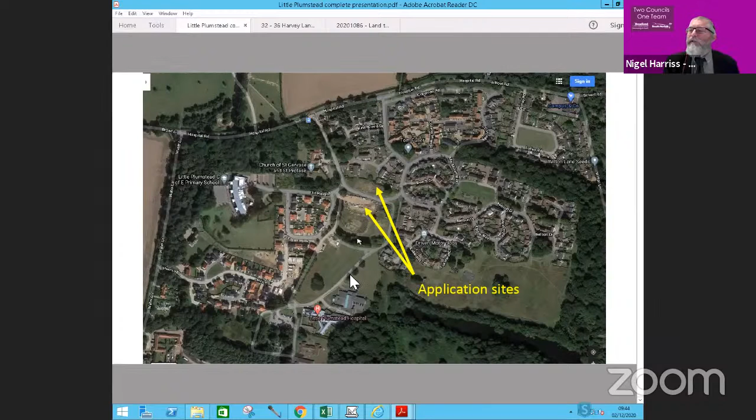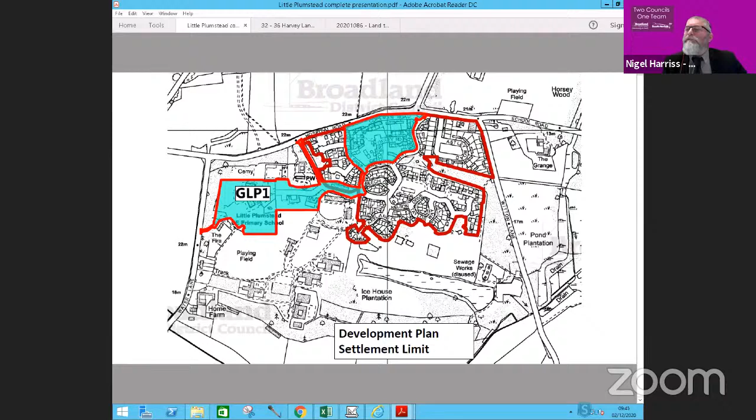Next slide is the extract from the site allocations DPD to demonstrate the existing settlement limit. This only really picks up on the more historic development in relation to the site. We've got the area here where 225 units were constructed, and the area within the settlement limit where an additional 75 were built. The northern application site, 2020-1200, is within the settlement limit. The site of the former Old Hall, adjacent to the settlement limit but outside, sits to the south here. You've then got another 108 dwellings in this location, which are outside of the settlement limit. Next slide.

In terms of the planning history, the key one was the 2013 permission, which was the second phase of the hospital that was declared surplus to requirements by the Secretary of State for Health. They secured outline planning permission for residential development, conversion of the hall, which you can see here, and car parking in relation to the hall conversion for about 17 apartments for market housing.

I've got a larger scale plan of that, illustrating the additional development that's now taken place under reserved matters and full planning, together with a new access put into Water Lane that delivered an objective from the Plumstead neighbourhood plan, so that development was not going out in terms of its access onto Hospital Road.

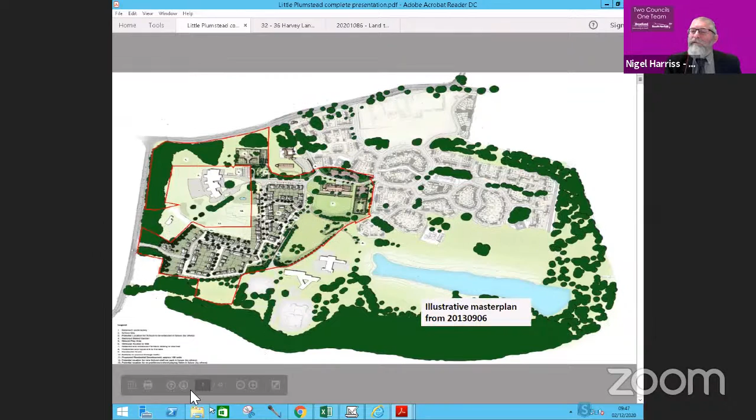So a new access serves all of these properties I'm outlining here, going straight back out onto Water Lane, but there is pedestrian and cycle connectivity back to the remainder of the estate, as there is public access to all of the woodland bordering the application site, including the open space to the south and north of the lake, where we have additional play areas referred to in your report. This is a larger scale extract of that master plan.

So this was the hall that was to be converted. It was a two-story building, and we'll come on to pictures of that. It was then to have car parking on the north side.

On the north side is where a two-story administration block, flat-roofed, used to exist in the NHS days when this was a functioning hospital, and then additional parking to the side, and I think what was going to be some private space, and then open space to the south of the former hall, and that's the area subject to the two current applications.

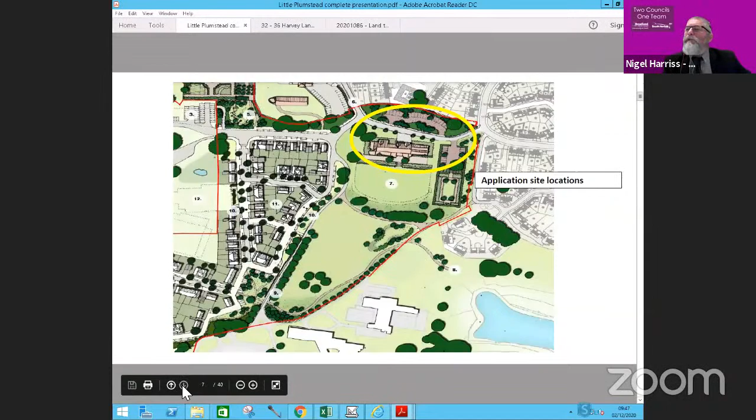So we'll move on to the first one, which is for the 11 dwellings on the south side of Old Hall Road. That's the application site.

You saw on those slides the route that comes in. Old Hall Road comes in off Hospital Road and then serves the existing residential development. The hospital access comes through and to the side, into the south here. That's actually been rerouted.

The original hospital access was this little spur off here, and it was seen more practical for that hospital to come off to a new estate road. So this area of former access road to the hospital has been landscaped and now forms part of open space as part of the wider site.

That access road then leads across to the primary school and also to the former walled garden, which is a successful community project as part of development on this site. Development has delivered a serviced access road to that walled garden, and that walled garden has now been taken on by the parish council. They've repaired it, and a community trust now operate a cafe and community shop from that site, which has very much come into its own in recent times.

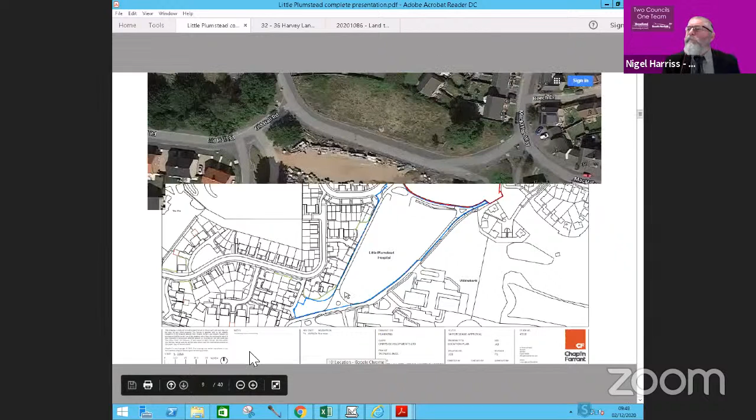So this is where the old hall stood. Following the fire, it had to be demolished because it was unsafe for health and safety reasons. So this is the brownfield area of the former old hall, currently used as a site compound in relation to the completion of the adjoining housing development.

There are some hospital service buildings here that provide electricity still to the retained hospital. They are referred to in the report. They have to be retained currently until they can be relocated, but the developer is proposing, as part of this application, to make them good, tidy them up and landscape them. And that's then the area to the north.

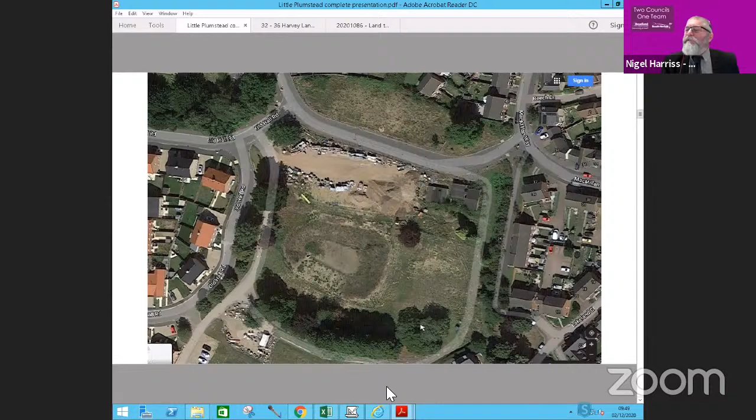Next slide. This is the footprint, looking at the center of the slide here, of the former hall that was to be converted and the old canteen building that stood there. And that very much follows now the footprint of the proposed development.

So these are the elevations of the old hall. This bottom right-hand slide is the frontage elevation that it presented to Old Hall Road, a two-story building with a long built form, as you see here, presenting itself to Old Hall Road. This was the picture of the rear elevation to the south, overlooking the open space.

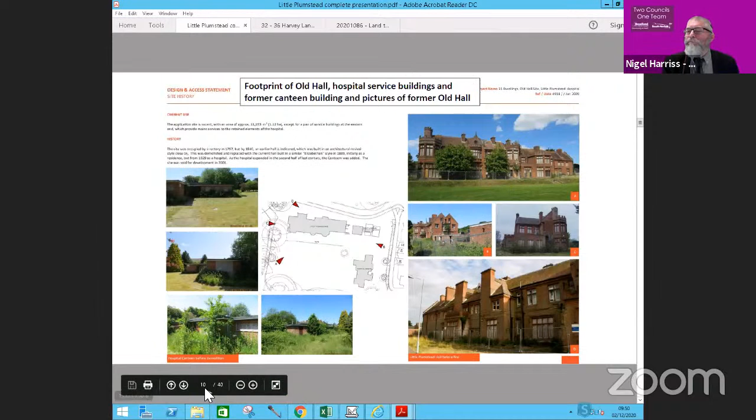So the application, when it originally came in, was for 15 dwellings. It proposed a terrace of units along the frontage, 2 linked units returning on the left-hand side, presenting themselves in single-story form to the west, and then a new access road, a private drive serving the retained service buildings, and also these units, 7 units at the time, which were to be for affordable housing.

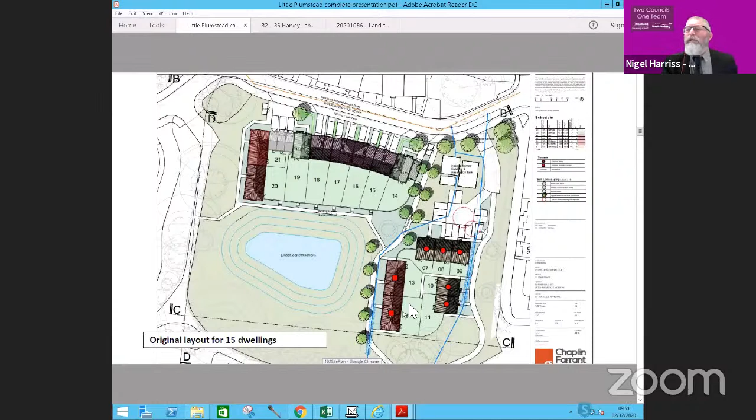That has been revised in terms of providing a layout that's more akin to the former building that stood there, and also so that we have less incursion into the open space. So we've now got 7 open market units. We've still got this crescent, 2-story crescent along the frontage. Only a single unit that returns itself on the left-hand side, and 4 affordable housing units still served by the private access drive. The bin storage and collection points have all been incorporated now, which the contracts manager has no objections to.

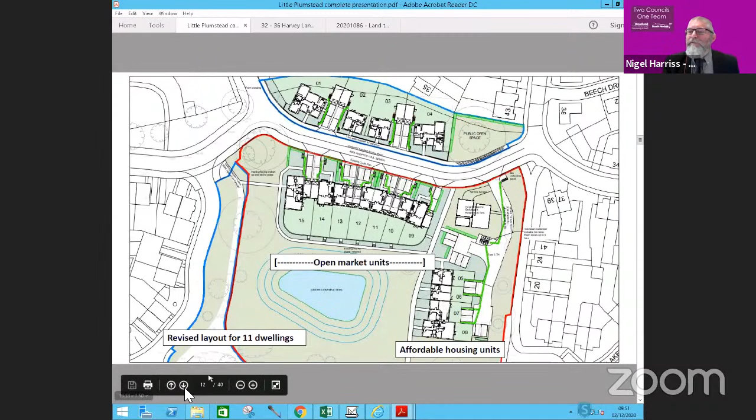It's policy compliant delivery of affordable housing. We move on to street elevations. This is looking at the north, the road elevation from Old Hall Road. So although it's a flat elevation, this is a slight crescent, presents itself with central gable and bookend gables at either end.

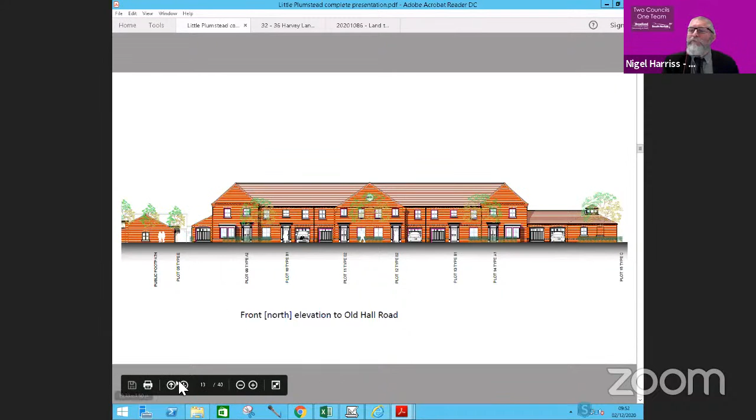That's then that single story wing on the right-hand side as you're looking at it, to the west, that returns and faces the existing 2-story development that the developer has built out recently. And then the affordable units, which are all bungalow types, carefully negotiated along with the council's housing enabling manager. That's the rear elevation. There's a ha-ha or a split level of open space to the rear of the site, which the boundary wall and railings above will follow, giving that nice open aspect and view out to the south. That's the single-story wing, and then the 4 affordable bungalows to the right-hand side.

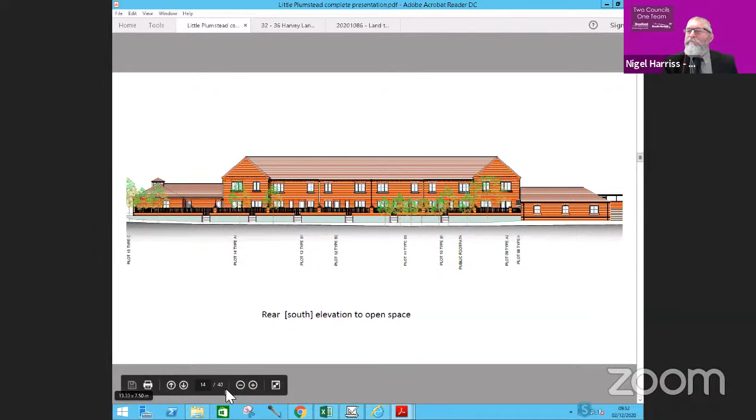You see those, that's the eastern elevation. You've got 2 1-bed units, a 2-bed unit, and a 3-bed unit.

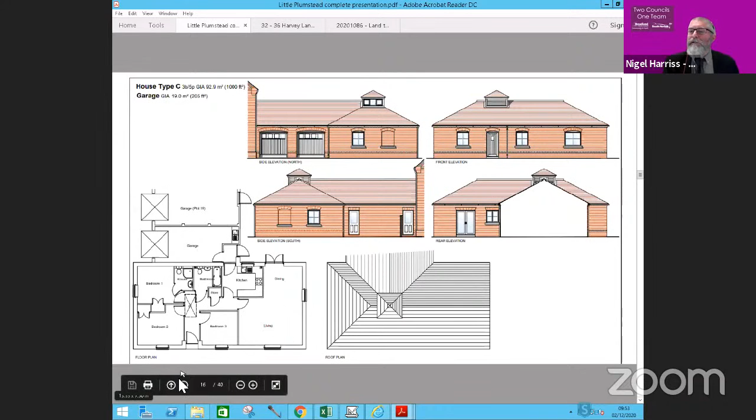So closer elevations, this is the single-story open market unit to the right-hand side that turns the corner. Nice design that links in then with the various house types. You've got 3 different house types, a mix of 3-bed and 4-bed units that form together that terraced crescent, presenting itself along the frontage where the old hall once stood.

So just go through those elevations. What you're seeing here is that individual slice through the dwelling type, but obviously these are then linked to form that 7-unit terrace.

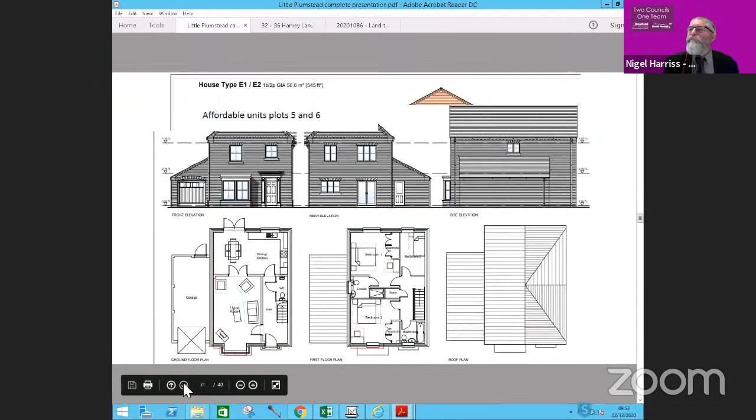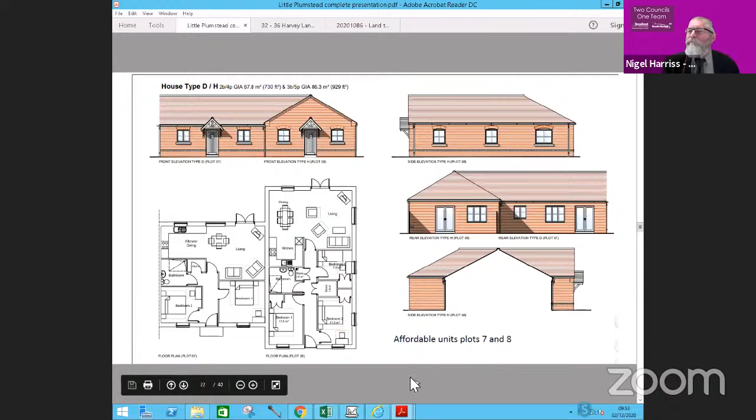Then we move on to the affordable housing units. So these, you've got 2 1-bed units, a 2-bed unit, and then the 3-bed unit at the end. That was negotiated up from a 2-bed unit to meet specific need identified by the housing enabling manager, and the developer has incorporated that change within the proposal.

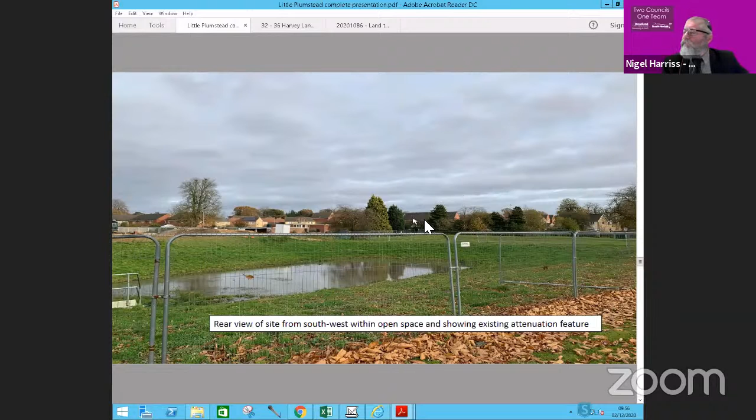So the site itself sits in this area here and in this area here. So this is the area of the former Old Hall. You can see existing residential development beyond. And then the area here, which is proposed for the affordable housing units. There is a footway that separates the site from existing residential development that then sits the other side of that. And you can just make out the roofs, etc., of that existing development.

So we're now the opposite end of the site, again on that open space. We're looking at it from the southeast. You've got all preserved trees on this site. There's a bank of preserved trees that form the southern edge of this area of open space. There's then another area of open space beyond. The attenuation basin in this area here and the site along this area and to the side.

Then move on to the application which is linked to the north side of Old Hall Road, which is for 4 properties, 2 bungalows and 2 houses.

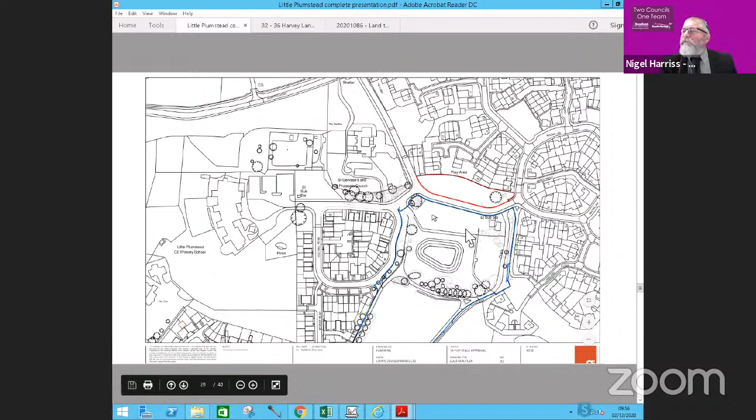So the site you were looking at was on this area here and here. So we're now flipped over onto the other side of the Old Hall Road.

So that's that detailed area here. It does include a large chestnut tree here, which again is a preserved tree.

And just to relate it to existing development, this is Kevill Davies Drive. There is a children's play area enclosed with bow-top fencing here, and then a wider buffer of grassed open space around that play area.

You've got 2-storey properties here, here, and here. Gable ended at this point.

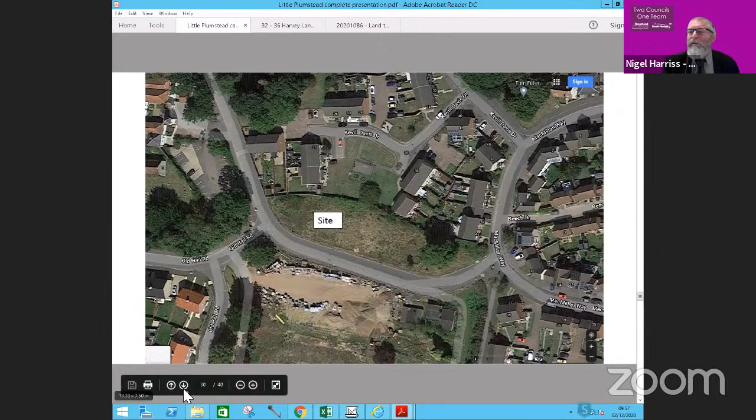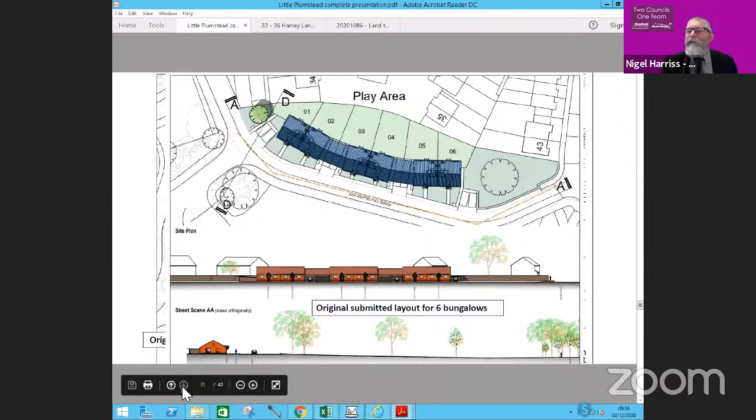That layout was subsequently changed and reduced in unit numbers to 2 bungalows at either end and included a footway, a new footway along the site frontage with the pram crossing at this point here to tie in with an existing footway on the west side that leads in from Hospital Road and also leads up to a bus stop at the top end of Hospital Road.

And then 2 houses here, located here so that their rear elevations overlook the play area and are not compromising the amenity of the neighbouring houses to the east and to the west.

All of those properties served by paired access drives, 3 parking spaces for each, which includes a parking space within the garages, which are oversized, so they do count as parking spaces for our standards.

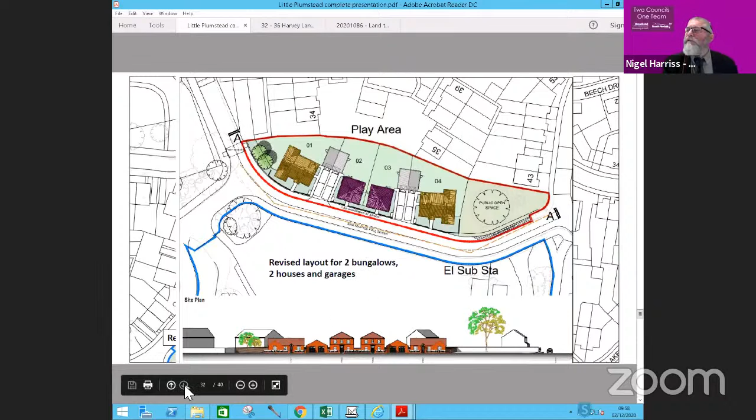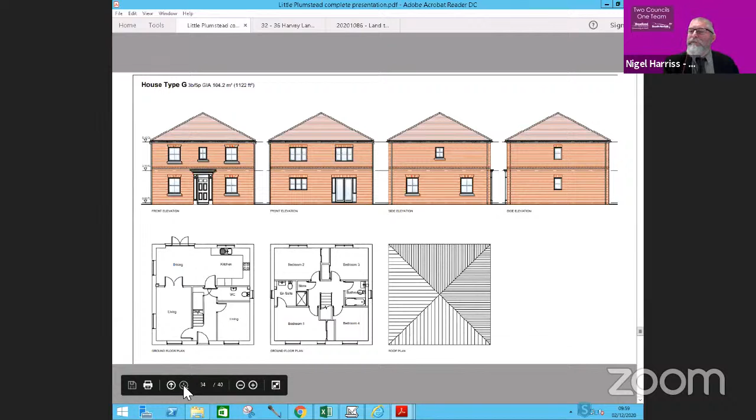And then the 2 houses that sit centrally and address then the 2-storey terrace development proposed on the opposite side. So we're getting back that street frontage that formerly used to exist along this part of Old Hall Road. They're the garage types that are paired between the bungalows and the houses.

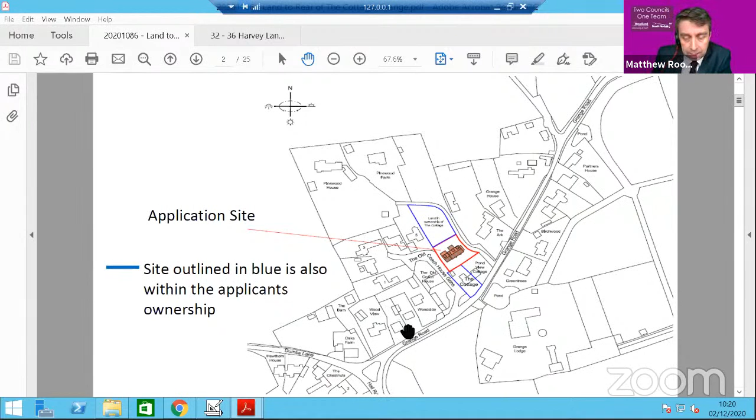At this point, that then continues to two further properties to the north, Pinewood Farm and Pinewood House. To the west of the application site, we've got another small development known as the Old Coach House Gardens, which is here, and that achieves access via a drive running in that position. You can see amongst existing residential properties in the surrounding area, the remaining parts of Hainford run in this direction to Dumbs Lane and further to the southwest of the site.

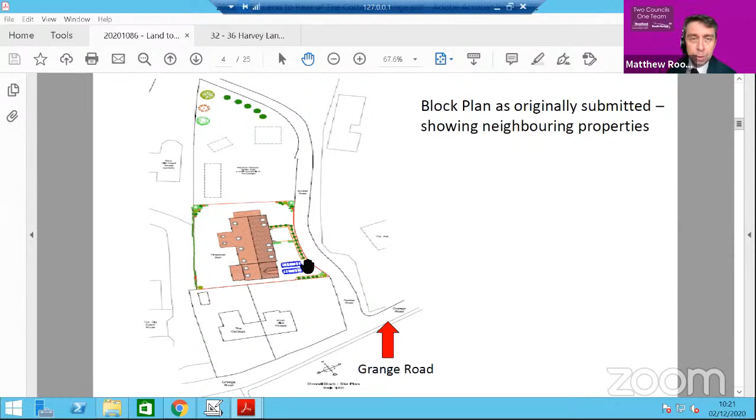This is a block plan originally submitted. When the application was originally submitted, the orientation of the dwelling was running north-south. Concerns were expressed about the proximity of this gable to the rear of the neighbouring properties, and also the proximity of the rear garden to a line of Scots pines running along this boundary. It was seen that this probably wasn't the appropriate orientation, and the dwelling has subsequently been switched around.

This is the current form of the application site, now set running in an east-west orientation, which allows an area of car parking to the front of the property with the access in this position here, an area of garden to the rear, and space to the sides, both to the east towards the neighbouring property and to the west to the Old Coach House Gardens development.

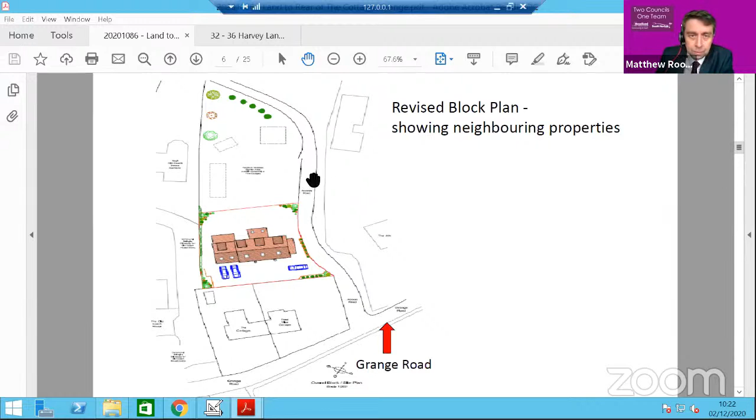Just taking that in a little bit closer, you can see the arrangement of the site itself, with the access coming in here, an area of forecourt to the front. There's a cart shed, garage area for 2 cars, allowing cars to park, turn and maneuver out onto the private drive in a forward gear.

This also shows the separation distances to the western boundary. This boundary is angled so that it's wider at the front, about 4 meters to the front, 3 meters to the rear, and 2 meters separation on the eastern boundary.

The other thing to note, because of the relationship to the neighbouring properties to the south, it's proposed that this roof plane will be provided with roof lights, and the rear elevation, which looks across the rear garden, is provided with dormer windows. You'll see those in a moment on the elevation.

It just shows the relationship and distance - 8 meters separation between the front of the property and the dividing boundary to the cottages, approximately 7.5 meter rear garden off of these projecting, extended elements to the rear.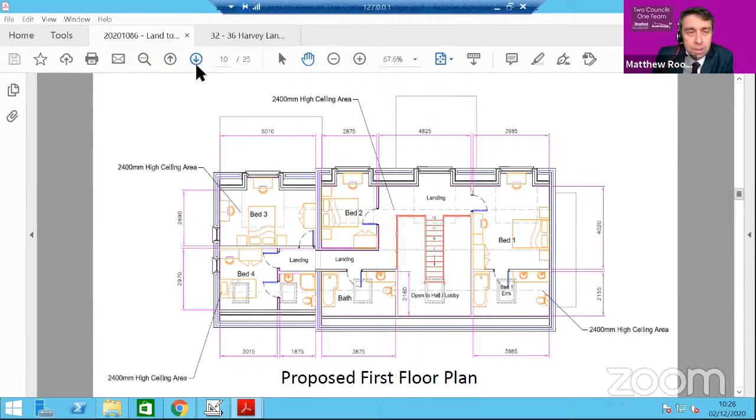The other thing to note, there are windows on the side here, but these are intended to be fire escape windows. On the side elevation, there's an indication that these would be fitted with a louver to ensure there's no overlooking in that direction. Officers have recommended a condition to require details of that treatment, just to ensure it doesn't result in any adverse overlooking.

Going through the elevations, this is the front view of the property. It's designed as a 1.5 story property with the bedrooms and en-suites up in the roof space. It's got almost the feel of a barn with the main footprint of the dwelling here, and then these more subservient elements to the side, clad in timber, and the open cart lodge on the western side of the property.

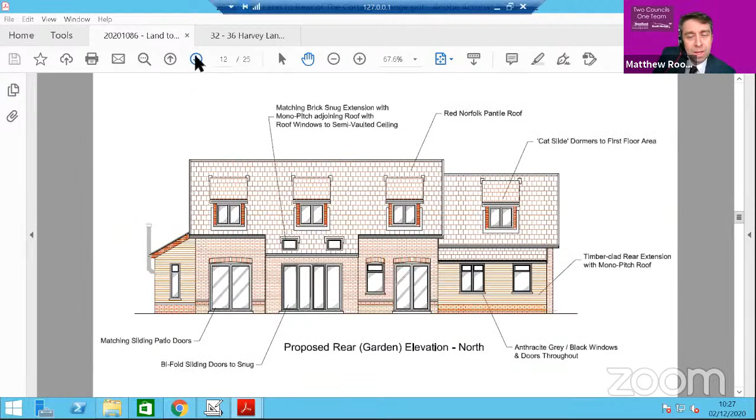That's the rear aspect with the dormer windows. The side, that's the side towards the private drive, and that's the side elevation towards the old coach house gardens.

And that's where I mentioned about those escape windows. It says on there, concealed panel, feature louver panel for fire escape window. We don't have a detail of that at the moment, so we're suggesting a condition to have a detail of that treatment, just to ensure that louver is angled in such a way that it doesn't allow any kind of views out of those windows towards the neighbouring properties.

Now to some photographs of the site. So this is the access from the private drive onto Grange Road. That's the view to the south, across the front of Pondview Cottage, and in the opposite direction across the property known as the Ark.

Views from the drive or from Grange Road looking back towards the drive. It's a hardened surface, hedged either side at the moment, and you can just see it continues its line through. Taking you up that drive, you can then see the entrance into the site.

This is the access point into the site, and then the drive continues further to the north to the other two properties I mentioned. This is probably the best view that shows the context of the Scots Pines on the western boundary of the site and one of the neighbouring properties at the Old Coach House Gardens.

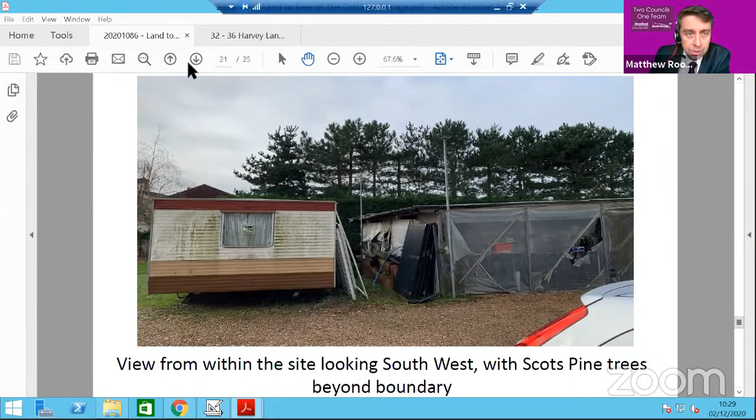Views from within the site. Currently there's a few structures within the site. Obviously those would be removed to facilitate the construction of the dwelling. But once again, you can see the treatment of the Scots Pines to the boundary and a Leylandii hedge, which is within the applicant's ownership, just on that boundary itself.

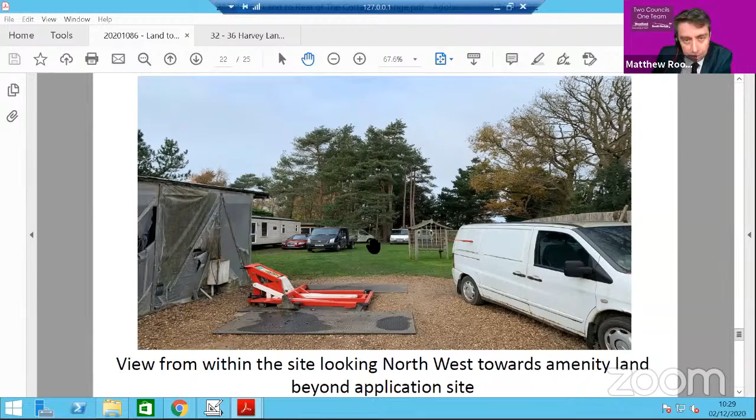Views within the site itself. The actual extent of the application site is just beyond this little wooden structure, so estimated about this line here. These elements are again within the applicant's ownership, an area that he's using to stand a few cars and things like that on at the moment.

That's the boundary to the private drive and the two oak trees that I mentioned when we looked at the tree details. And then just some general views from within the site, and the final one, just looking back at that layout of the proposals.

Just to the summary of the report. As I've said, this is a reserved matters application. Matters for consideration are the layout, scale and appearance of the dwelling, including proposed materials, also the access, parking and landscaping of the site. As I've said, outline approval was granted, and that was granted by Planning Committee in March 2018. The application is brought before committee for determination at the request of Councillor Neeson for the reasons given at paragraph 4.6 of your report.

The application site is located within the settlement limit that's been defined for Hainford, with existing two-storey residential development around it, and together with the outline approval, the principle of development of this site has been established.

Draw members' attention to the supplementary schedule, page 89, where the Parish Council have raised some additional comments. For those who haven't seen the supplementary schedule, that was a concern that the site was remote from the local school with no footpaths to the school, and also that the proposals showed fossil fuel as heating. The case officer has responded to say the site is within the settlement limit and has been granted outline approval, so that's something to consider against the proximity of the school. In relation to the heating, that's not something officers or the applicant is seeking approval for - that would be for building regulations to consider and is not a matter for determination under this particular application.

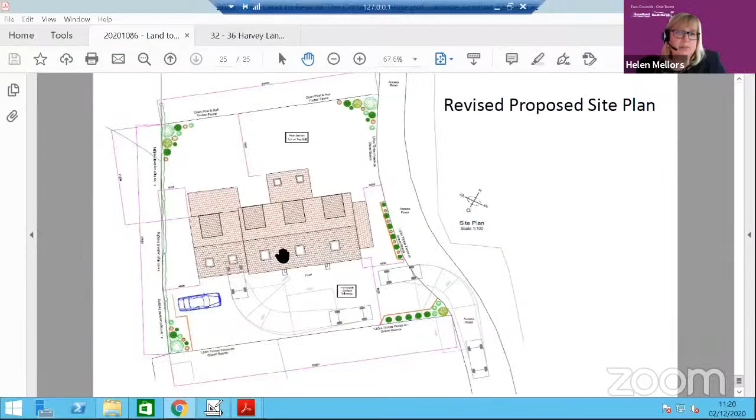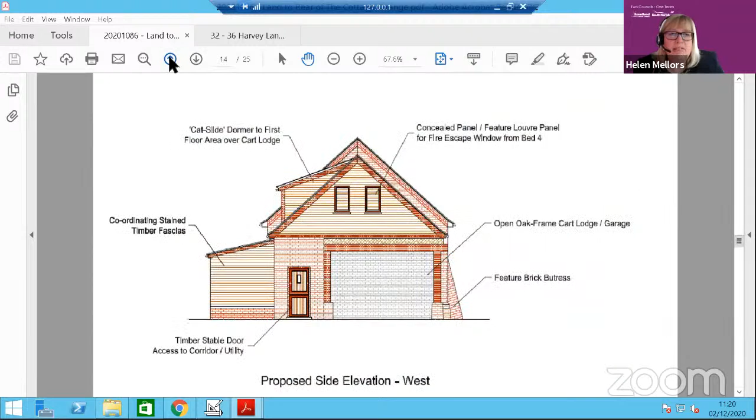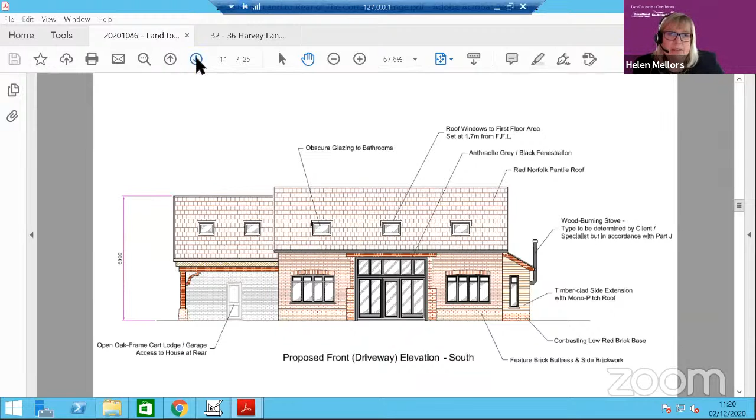So we are looking at whether the new dwelling is in character and keeping. As Matt said in his presentation, it has been designed to have that rural feel about it. It's not a full 2-storey. So if we just go to that, you can see the chalets, but that elevation is actually showing it in its sort of scale and form. So it's not as bulky, I would say, as the surrounding properties, and has been designed for this infill plot in particular as a chalet type bungalow.

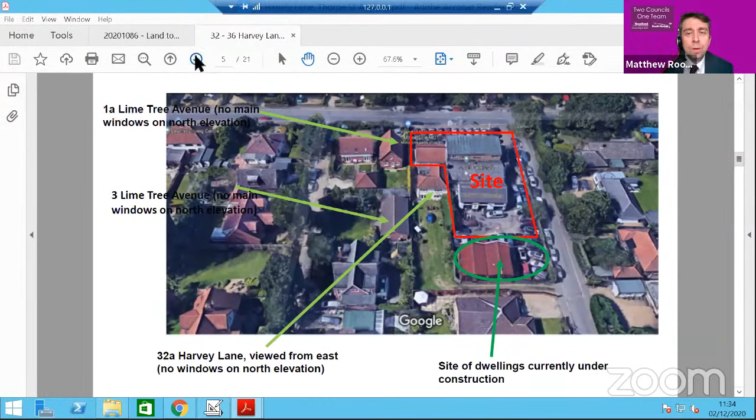Then running into the site layout plan, the application is for 8 dwellings in total.

4 of them comprise 2 pairs of semi-detached houses, which are 3-bed semi-detached houses fronting onto Boulton Road. Each has 2 parking spaces.

Each has garden space and areas for bin storage. The bins are stored at the back of the property and brought forward to the collection points here and here on bin collection days.

The second part of the application is an area of 4 flats, all under one roof. 3 of those are accessed via the Harvey Lane entrance straight into the front door.

2 are on the right hand side, accessed from that front door through a communal doorway. The 4th flat is accessed off a separate doorway onto Boulton Road, with a car parking space provided for that flat.

3 further parking spaces are provided here, an off-road parking and turning area with a visitor space, plus a bin store and cycle store in a secure building. Bins would be pulled out for collection day and stored away - a communal provision for the flats.

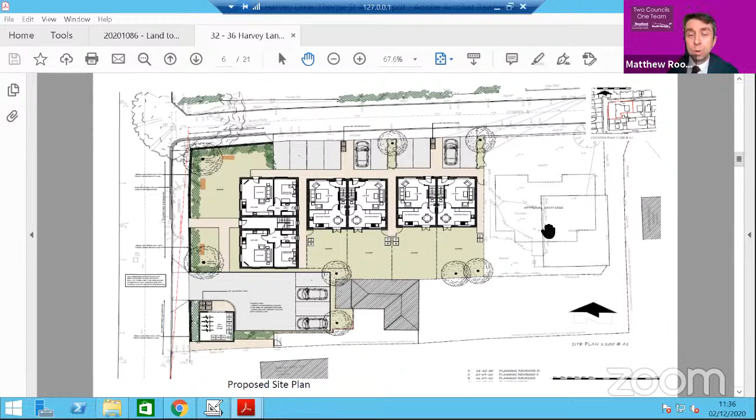The neighbouring plot to the east has planning permission and construction has started for 2 dwellings in a pair of semi-detached properties. There's a plan of that shortly.

Moving through the elevation - this is the elevation of the flats, the view from Harvey Lane. All 4 flats are built under one roof, with a door serving flats 1, 2, and 3, while flat 4 is served by a door onto the elevation towards Boulton Road.

This also shows a low wall and hedge to the front, and access into the parking area for the flats, along with the bin and cycle store.

Turning the corner from Harvey Lane into Boulton Road, the flats turn the corner as well, with windows towards Boulton Road. That's the arrangement for the 4 properties and the 2 pairs of semi-detached houses.

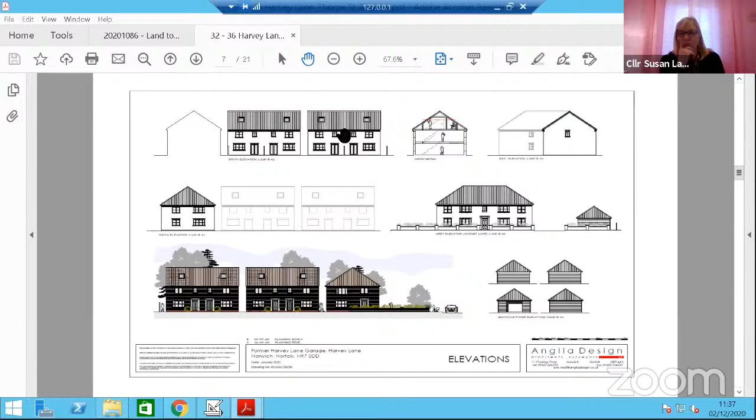That's the rear elevation of the semi-detached houses with 1st floor bedroom windows, and the 3rd bedroom up in the roof space for each property.

Floor plans showing the ground floor arrangement. The flats are arranged as 1-bed flats, each one a 1-bed flat, with one having its entrance off onto Boulton Road.

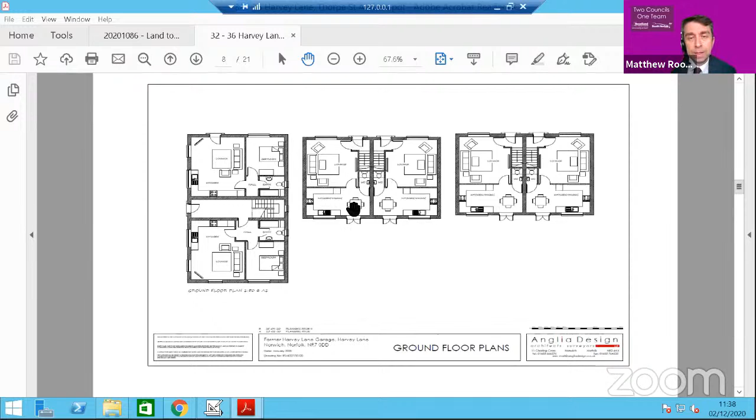These are provided with lounge and kitchen at ground floor, 2 bedrooms at first floor, and a 3rd bedroom up in the roof space for the houses.

Photographs of the site - members will probably recognise the context. This is the existing Harvey Lane car sales, a 2-storey flat roof building, which will all be demolished along with the buildings to the rear to facilitate the development. That's a view down Boulton Road.

There are double yellow lines currently in those positions. Comments have been made about the requirement to reinstate those, which is considered within the report.

Views from around the site showing the building and the context of the existing car repairs and the amount of cars stored while waiting to be serviced or MOT'd.

The context of the surrounding properties, the hipped roofed properties in the surrounding area, very much reflects the form of the proposed dwellings.

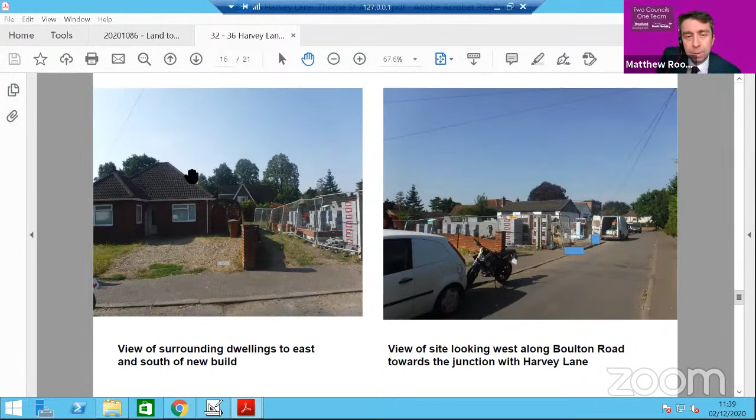Views along Boulton Road - this is the site under construction for the pair of semi-detached properties just to the east of the application site. That's the front elevation design of that pair.

Once again, rooms are up in the roof, albeit under dormer windows to the front. This plan shows it has parking spaces to the front, which would reflect the parking spaces proposed for Boulton Road.

Some more views from within the site. Obviously, this was when it was still the car sales site, so it's got cars that were for sale at the time out of the front of the forecourt, and the neighbouring property at number 1A, which is a chalet. You can see that there.

This area here would all be demolished to make way for the parking area for the flats, and the bin store and cycle store would be at the frontage of the site, about that position there.

Just some views across the frontage of the site. Once again, this is looking within the site, across the road to the semi-detached houses on the opposite side of Harvey Lane, hipped roof form, which very much reflects the form that's being proposed. A little further down Harvey Lane, just before the road drops down the hill, there's a block of flats, albeit those are 2.5 storey because they've got accommodation in the roof, but there are other communal buildings in the locality.

And some views on Lime Tree Avenue, just looking back across the frontage of the properties on Lime Tree Avenue. The application site is just beyond that fence line there.

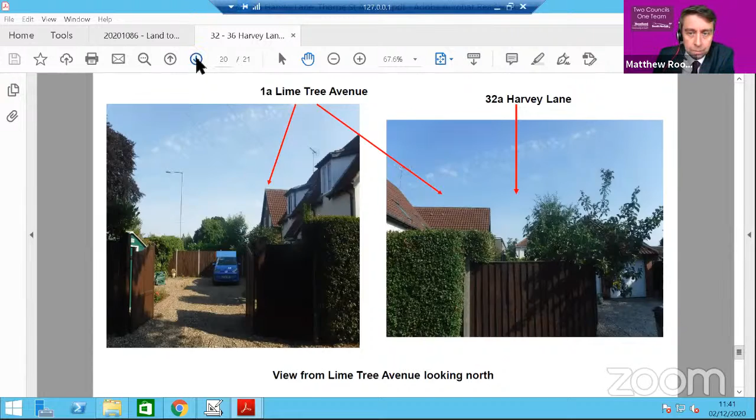And then back to that main slide. Going to the presentation, I'll leave that one on.

As I said, this application seeks full planning permission for 8 new dwellings, demolition of the existing car sales and vehicle repairs, 8 dwellings comprising 4 houses as 2 pairs of semi-detached, and 4 flats.

The application is brought before committee for determination as the proposed redevelopment of the site would result in the loss of an employment site. As I mentioned at the beginning, the application site is located within the settlement limit defined for Thorpe St Andrew.

Amongst a variety of different house types, including detached bungalows, chalets and houses, and semi-detached houses predominantly opposite the site. Although the site's last use was as employment, the site has not been allocated for this purpose. Therefore, a residential redevelopment is acceptable within the settlement limit.

There are no updates to make you aware of in your supplementary schedule.

The issues for consideration are whether the position and design of the houses are appropriate with regard to the character and appearance of the area and neighbour amenities, and whether the proposed access and parking arrangements are acceptable.

The houses have been designed so that 4 flats, each being 1-bed accommodation, appear as 2-storey hip roof buildings to reflect the forms of the houses on the opposite side of Harvey Lane. Given the position to Boulton Road, the flats are dual aspect, so that one flat has its front door on that elevation with windows facing Boulton Road. This allows the building to turn the corner, which is more preferable than a blank gable.

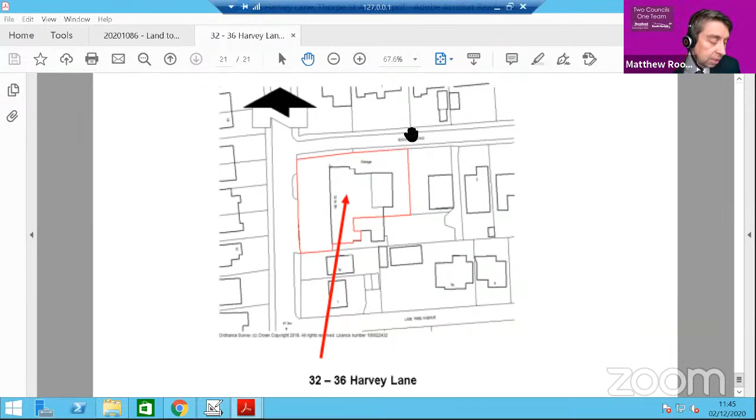Is there any general rule within Broadland of a year or more? 12 months, I think, until COVID, was the sort of fairly standard. The report at 5.7 does set this out, that they did undertake this sort of marketing approach for 6 months, and then the site was purchased by somebody who had been advised by the local authority that because it was in the settlement limit, there was a reasonable chance of getting planning permission for it. So we took a punt, and therefore it was taken off the market.